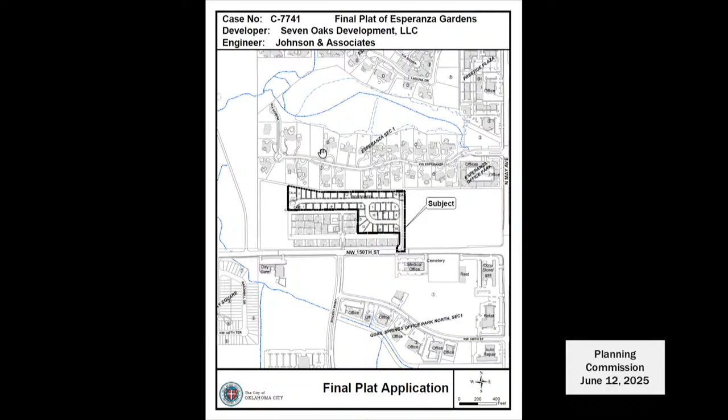The city sends out that notice. Those are typically land use labels. It could have just been shifted, could have been from a former zoning. This property is not permitted to have any multifamily on it. Right, and that's what I was thinking. It was probably the original zoning.

It just says final plat application, so I was assuming it was that. Will there be 1 or 2 entrances? Because I've seen in the PUD, I've seen this entrance that's described here. I've also seen that cul-de-sac and that pseudo entrance to the west. I think the western entrance is a temporary entrance that they have to have for fire protection, for fire protection to conform. And is that on the applicant's property, or is that on the neighbor's property there, the office property?

The temporary would have to be in an easement. It's on the office property. There's an access easement there for emergency services.

I spoke a little bit earlier with someone about the height of the homes that could be built backing up to the Esperanza neighborhood. When I called the city, I was told that it would be no more than 1 story in tract 1, or 35 feet. Now I'm told it's 2.5 stories permissible. Yeah, I believe that the 35 feet is 2.5 stories per the PUD. So which one do you go by, the 35 feet or the 1 story? The PUD is per the base zoning, which allows 2.5 stories or 35 feet.

So the house plans haven't been designed yet, but that's what we're allowed to build to. I'm not sure who you talked with at the city and at what point, but the PUD that was approved did not have a limitation of 1 story on the height. I see.

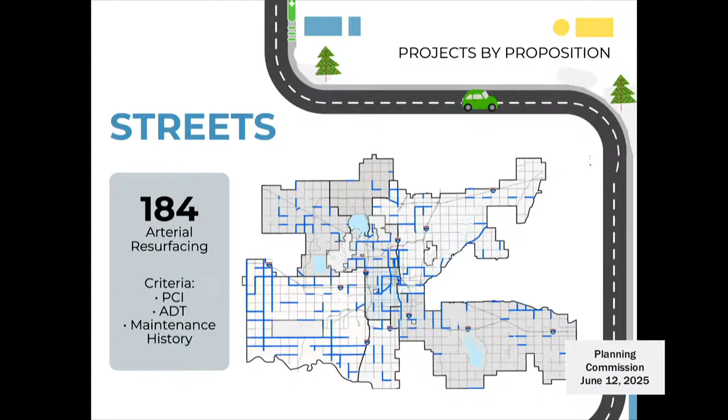You can see the criteria as well on the left there for resurfacing, for example. Traffic counts matter a lot. The PCI, or the Pavement Condition Index, matters a lot.

Sidewalks follows closely Bike Walk OKC, as was mentioned earlier. That was used to prioritize these. Most of the pedestrian priority areas, 13 of them, have an amount of money that will be used to implement Bike Walk OKC.

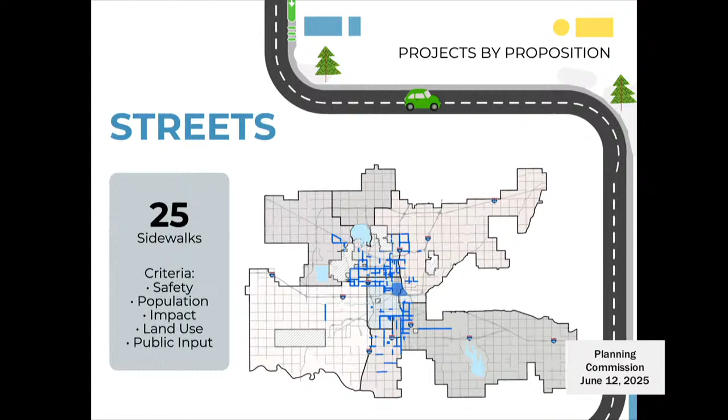Here are those pedestrian priority areas, and in addition, we'll have school access, transit access, and park access. There are funding amounts dedicated to providing sidewalks to those important needs.

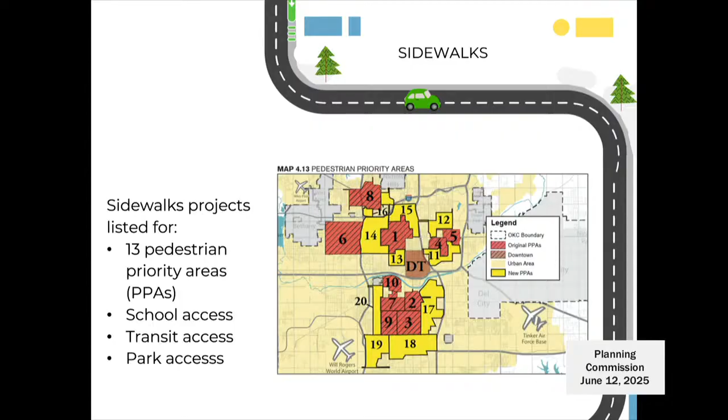Street enhancements, there are 13 listed. Wanted to mention, this is one change that was made since the study session and since the packet was sent out. So there were two major projects downtown that were combined. That's a change from what's in your packet, but the project details, the funding is all the same.

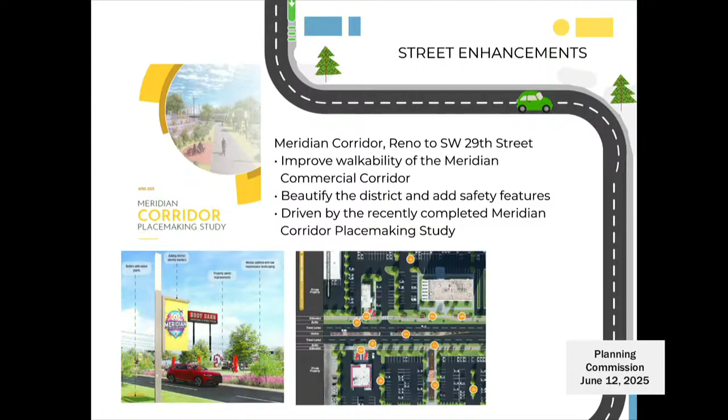Just real quick on the street enhancements, they're driven by, in some cases, like the Meridian Corridor, some recent planning work that we've done. And also the next slide, Classen, will be informed by some planning work that we'll be getting pending the outcome of our federal grant. We'll be starting on that this summer, as we will be starting on the downtown strategic plan, which will inform the downtown expenditures.

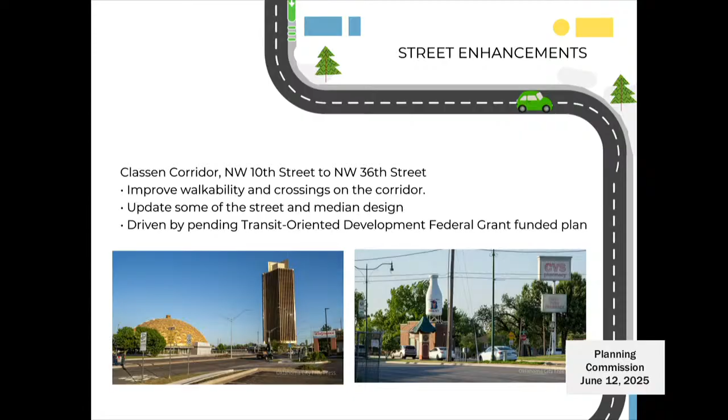So moving on, we've got several bridges, it's 25. I don't have a slide for economic development, so I'll mention that we have $145 million for economic development and community development, which includes affordable housing. $50 million of that will be dedicated to affordable housing. So we can go to the next slide.

We have 25 bridges throughout the city that will be replaced or improved. And of course, that's a safety issue and heavily based on the condition of the bridges themselves.

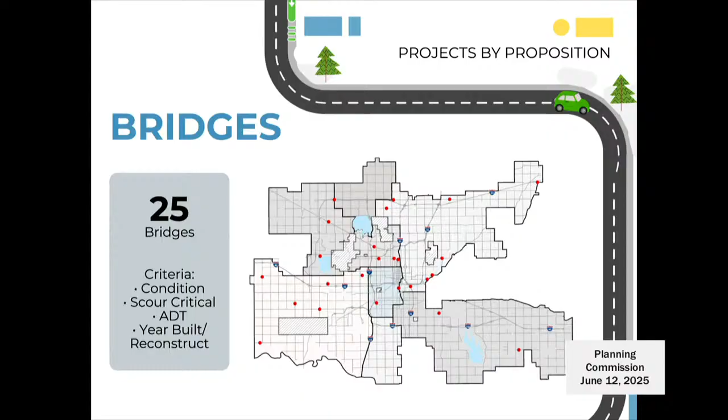We have 25 traffic intersection improvement projects. You can see the criteria there, of course, heavily based on the need, based on the usage of those and the safety factors that we've considered.

Libraries, there are several library improvements, as well as one new library. Parks, that's one minor change. We've combined two state fair park projects that were listed in your packet, so that's now one project. The amount stays the same, the intent is the same, just simplifying a little bit.

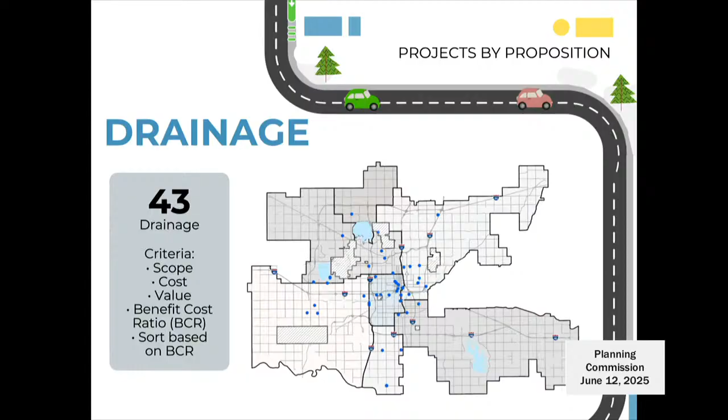And I know there are many, many projects that we would like to do, but we just can't. We've spent a lot of work on prioritizing drainage as we have all the others.

Transit, there's dedicated funds to some facilities that need to be constructed, and again, one new change shown on the slide, a new listed project for the purchase of buses. So the amount is the same, the funds were just taken from the unlisted category and moved to a specific project, just to let people know that we are purchasing additional buses to enhance and replace the fleet.

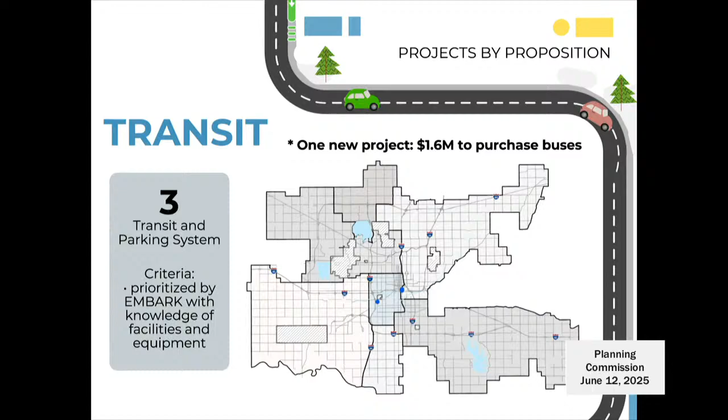And I believe fire, second to last, is fire. And these show the criteria. Of course, the main criteria is population growth. I did want to point out, this is heavily based on a study that was done in 2023.

You'll note that there is no new station in the Northwest, but that is because we actually have funding for a new station in the current bond. It wasn't specifically called out in the Northwest, but the fire department is working right now with Public Works to design that.

Let me find it. It's on 164th, I believe. So 15300 North Rockwell. That will be important to that area of the city, which we've been looking at for some time with regard to comprehensive plan amendments and new plats and new developments. So we're excited that that will be coming soon in that area.

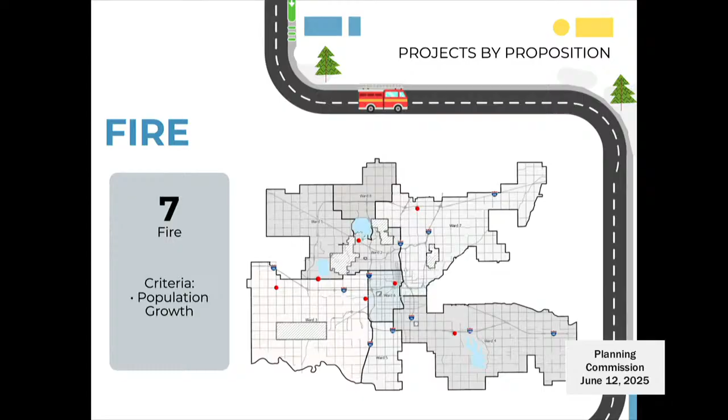And then moving on to police, this includes also courts, family justice, and emergency management. We've got 4 new projects in that as well.

So again, a lot of work has gone into this. We're very appreciative of all the collaboration that's gone on with the various departments and Public Works. Pretty sure there's been a fair amount of overtime worked recently on this, as well as the city manager's office. So with that, we're happy to take any questions. I can, or Aubrey, Debbie, Chad, and also Fire is here as well. So any questions you might have?

I was going to thank you for your presentation and the detailed presentation that we got from you and other city staff, other department directors at the study session. There's some really exciting projects in here. I think this is much different than the last bond as far as the kind of projects that were included. So I'm really excited to see this move forward.

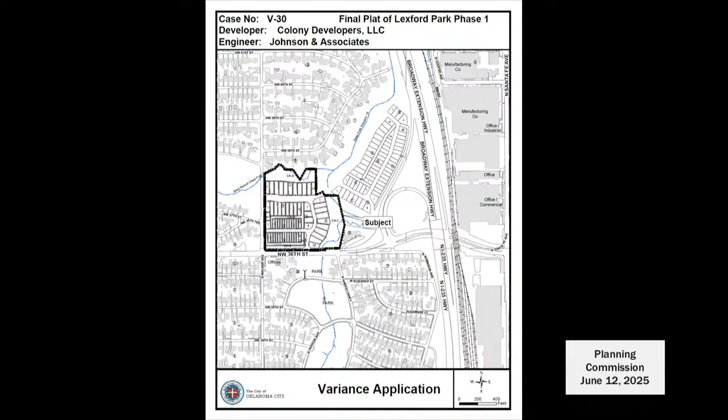Mark Zitzow, Johnson & Associates, 1 East Sheridan Avenue. Before you is a plat that was approved last year. If you've been by the site, it's under construction. The marketing team and branding team re-looked at one of the street names, which was 36 Terrace. After a conversation with the fire marshal, it was determined that there would be support for naming that street Lexford Terrace. So we're here asking for that approval today. Happy to answer any questions.

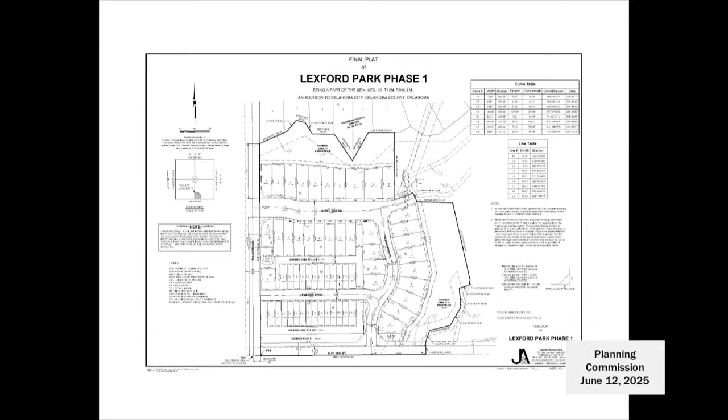Commissioner Powers, this is your ward. Yeah, this is not a surprise, really. I'm glad that the city's okay with it. I think it's a good idea. I don't have any issue with it. I haven't heard from anybody else who does, so.

We're just ready for a motion. If there's not anybody else here who wants to be heard on this item, I'll just go ahead and move approval on item number 6, V30. We have a motion to approve the variance application from Commissioner Powers, seconded by Commissioner Meek. Please cast your vote.

Aye. That item is approved. Thank you.

Item 7 is case DA 15PH, an application for consideration of a lot split or deed approval on property located at 12025 Southwest 104th Street, and a variance to the subdivision regulations.

Hi, I'm Jody Norris. I live at 12025 Southwest 104th. We have a 10-acre property, and we're just looking to have it split. We are lacking on the front the 300 feet required. It's 275 is what we have. So that's what I'm here for.

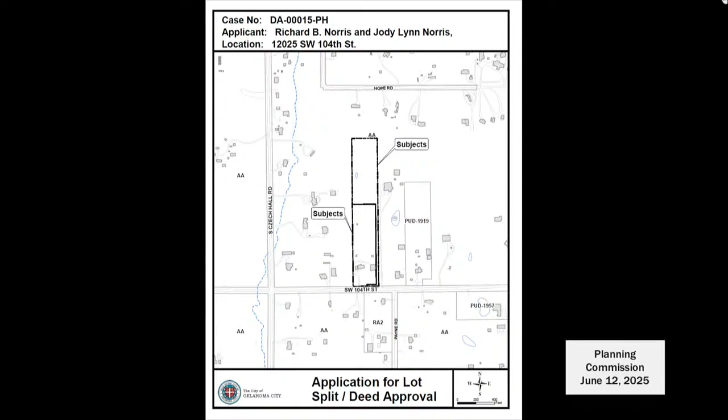We just are kind of looking towards the future. My husband's a 100% disabled veteran. He's going to be 60 next year. We're wanting to be able to put a family member on the back that would be able to help us with the upkeep of the property.

All right, thank you. Commissioner Meek, this is Ward 3. Yes, thank you, Mr. Chairman.

I've looked into this, and it is the variance that would be needed. They are 25 feet short of the required 300. I don't have any issue with this unless any other commissioners have any. No objections, I think it seems pretty straightforward. We're talking about 25 feet.

Right, do we have anyone signed up to speak on this? I do not have anyone signed up to speak. Okay, with that.

First we'll do the variance. I'd like to recommend approval of the variance to section 3.4.4.C.2E.C. Another C in there. All right, we have a motion from Commissioner Meek to approve the variance. It's been seconded by Commissioner Newman. Please cast your votes. Harrison, aye. And variance is approved. Now the item.

Yes, I'd like to recommend to approve DA-15-PH. All right, motion to recommend approval from Commissioner Meek, seconded by Commissioner Govine. Please cast your votes. Harrison, aye. All right, and that is approved.

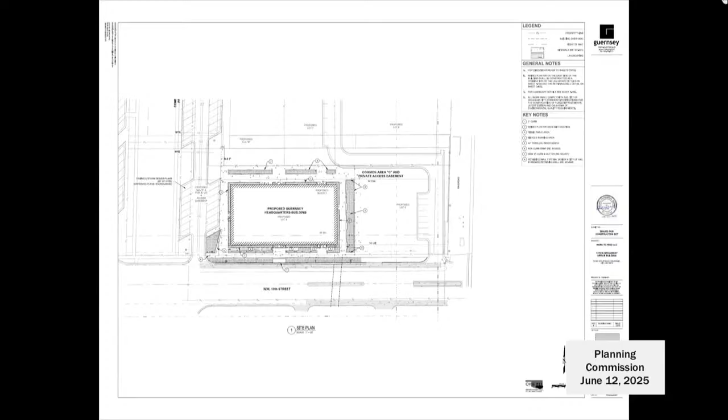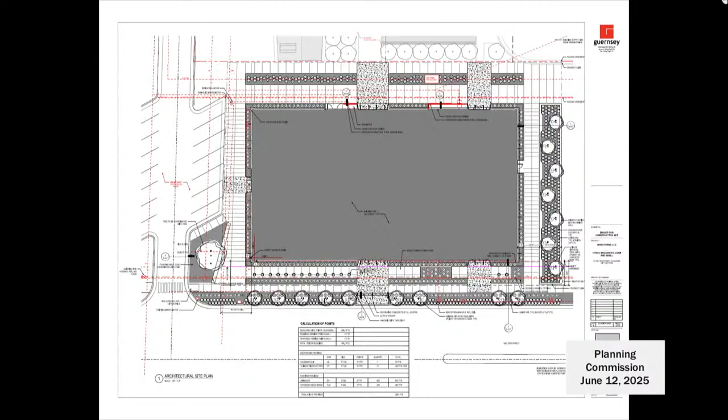Commissioner Govine, this is Ward 6. Thank you, Mr. Chairman. Yes, so this is part of the 13th and Broadway master plan development. It's a specific plan application. It meets all the guidelines, and I don't have any issue with it. I think it's a good addition to the Midtown downtown community. It's good to have a new.

Is this an owner-occupied office building? Yes, sir, is that right? So it's being designed and built by Guernsey to house Guernsey's headquarters? It's designed by Guernsey, built by Vincent. Oh yeah, built by Vincent. Correct, but it's for the headquarters office for Guernsey? Yes, sir. Great, well I wish you luck.

Are there other questions? I don't have anyone signed up to speak. Okay, I will move to approve PUD 1915 SP03. We have a motion to approve the specific plan. I'll note for the record that staff's review of the specific plan for the development indicates the proposal is consistent with PUD 1915 Master Design Statement and the Master Development Plan. That's been seconded by Commissioner Noble. Please cast your votes. Harrison, aye.

And that item is approved. Thank you. Thank you. All right, item 9. This is case CE 1142, application to close all of the platted public alleys in Block 3 of Trosper Park, Highland Addition, east of Highland Park Drive and south of East Grand Boulevard.

Good afternoon, David Box, 525 Northwest 11th. Here on behalf of the applicant, this is a closing application. Jared, if you go to the aerial, this has been contained within my client's site for many, many years. Whether or not it's ever been open to the public is probably debatable. So the closing of this will ultimately end in a vacation action. We don't believe it'll impact the public whatsoever. Happy to answer any questions.

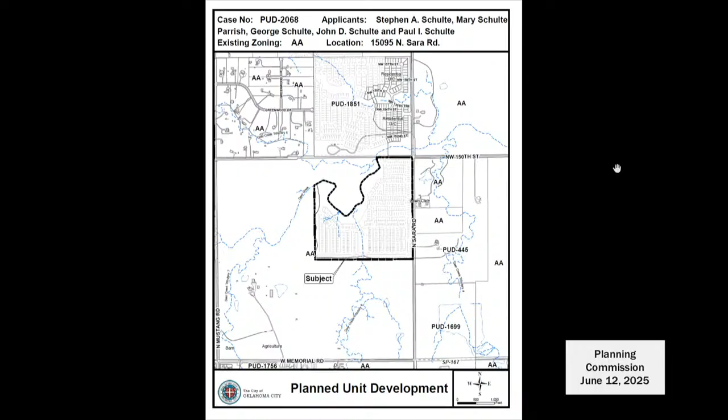Can you walk us through the development a little bit, about the 3 distinct tracts and the types of products proposed for each? Absolutely. The site is approximately 126 acres total, broken up into 3 separate tracts. Tract 1 in the north will be a private gated development with 125 single-family lots. Tract 2 will be 2-family, with a crash gate to tracts 1 and 2, and entrances onto tract 3. Tract 3 will be single family with 40-foot by 110-foot lots, approximately 379 of those lots. There'll also be 72 duplex lots - I didn't mention that.

And on tract 2, you mentioned a crash gate, so that's only to the north to the gated area? Correct. Connectivity to the south will be just like any other street. Yes, sir. There'll be 2 entrances onto Sara that right now I have planned, 1 in tract 2 and 1 in tract 3, but those could be shifted around as necessary between those 2 tracts since they're interconnected fully.

This is my ward. I don't have any real major concerns with this. I like the diversity of the housing type. Not in love with the 40-foot lots on the south tract, but I also understand that not everyone can afford a larger lot, a larger residence. So I think in the end, the diversity of housing types is a good thing.

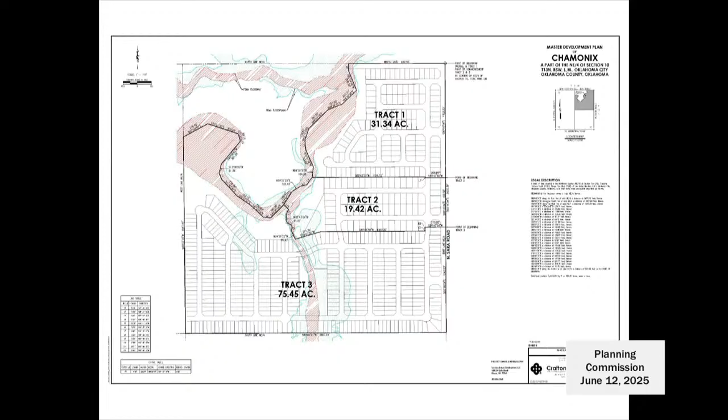Guys, I know I'm preaching to the choir, but I'm big on this. This is a PUD. This is the time and place in which it's a give and a take. This is a whole lot of houses, especially 40-foot lots on the south portion of this map, and every 40-foot lot would be responsible for their own rotting stockade fence along Sara Road. If now's our chance to require a masonry wall to be put in by the developer, I believe that's not a bad ask for this many lots and this type of homes.

I think that's a reasonable request. I think that's something they would consider for sure. Commissioner Powers, do you have something to say? It's nice, but writing it into the PUD would be better. Are you in a position to contact your client and find out whether they're agreeable?

Can you approve a masonry wall all the way down Sara Road? The discussion was—if you could come to the mic, we just want to make sure we capture this—the discussion was that we're going to put in the PUD that we would do brick or stone columns every 25 feet with a cedar fence cap, uniform from north to south, all maintained by the homeowners association, with nice decorative entrances beyond that. My concern specifically is the stockade portion, and we're asking that to be changed to full masonry, at least on the Sara Road main thoroughfare, other than where you have gates.

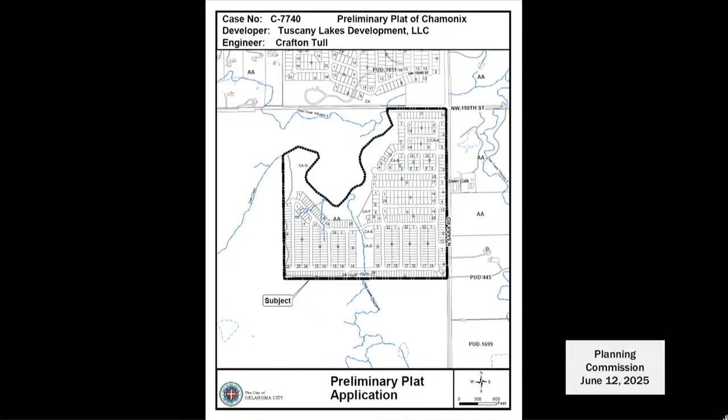I'm just here to answer any further questions regarding the plat. Are you in agreement with all the TEs? We are in agreement with all of the TEs and seek approval.

We're going to add a TE. Looks like you got a maintenance note in there already on the plat, so that may suffice. That's pretty typical for HOA plats. Does that include the fence, though? It would include anything that's built by the HOA normally. We'll add it, just to be safe.

I'd like to make a motion to approve C-7740 with TEs 1 through 6 as written, with the addition of TE number 7 as a plan note to state that the perimeter fence will be maintained by the HOA. On Sara Road, the whole thing? The entire perimeter fence maintained by the HOA.

We have a motion from Commissioner Noble to approve the item. Our system is down, so I need a second by voice. Seconded by Commissioner Powers. We'll voice vote. Commissioner Powers? Aye. Commissioner Meek? Aye. Commissioner Privet? Aye. Commissioner Newman? Aye. Commissioner Govine? Aye. Commissioner Harrison? Aye. Commissioner Noble? Aye. Commissioner Clare is an aye as well. That item is approved. Thank you.

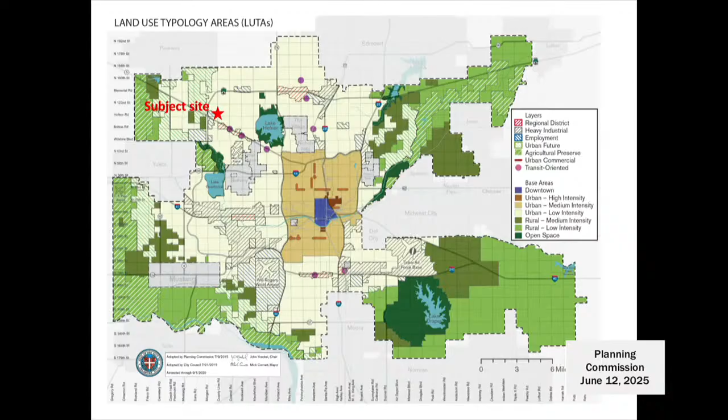Vaneri Mujica Ortiz for the Planning Department. This is a request to remove the employment LUTA, from the urban low LUTA base designation. The associated application is PUD 2069. It's located on the northwest quadrant of the city.

In terms of the existing conditions, I want to clarify something here real quick. The pink polygon or square there is actually the proposed amendment. The blue ones is what we are recommending to expand in case the recommendation is to approve the CPA. So you're going to see both in all the maps, but the original proposed amendment is only the pink area.

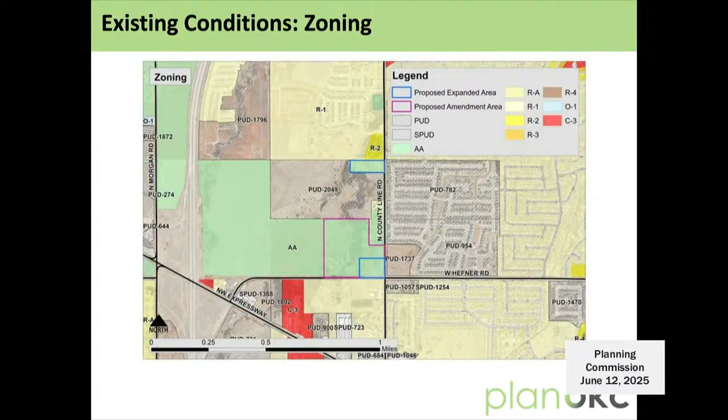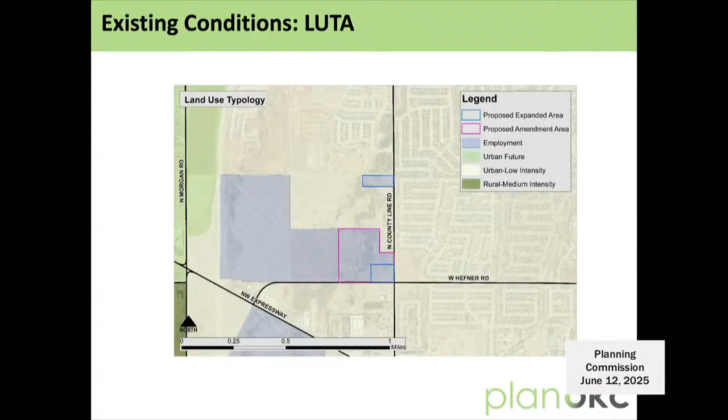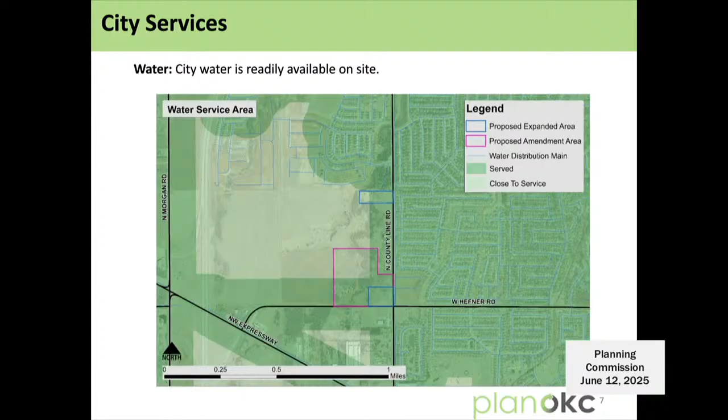In terms of land use, almost all the area is undeveloped. In terms of zoning, it's agricultural, surrounded by residential. In terms of the LUTA, or land use typology, it's an employment area. To the west, there's more employment area too. To the north, we have that little stripe of employment area, and to the south, urban low plus a little bit of employment area too. In terms of city services, as is common of these areas, city water is available, sewer is available, and fire and emergency services are within urban response time.

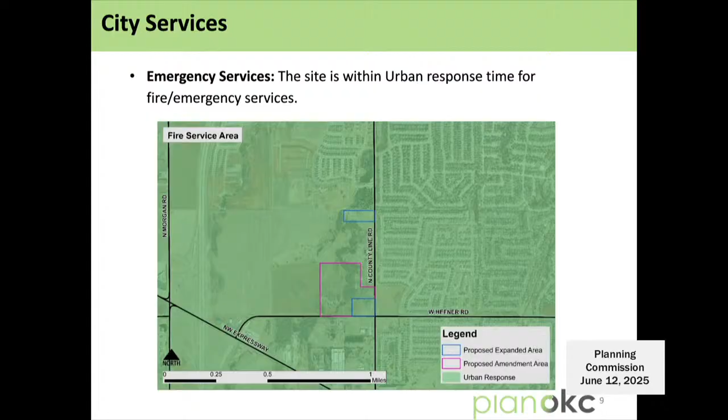In this case, the subject site is an excellent site for employment uses due to its proximity to highways, other employment uses, and city infrastructure. Well-served and situated employment land sites are limited on the northwest area of the city, where sites suitable for residential uses are more plentiful. Preserving employment land to facilitate job creation remains critical to Oklahoma City's overall economic stability and future growth. Removing the EM designation on this site will reduce the amount of development-ready EM land available on the northwest quadrant of the city, lessening the city's ability to retain and attract large employers. Based on the finding above, the staff recommends denial.

But in case the Planning Commission decides to remove the EM layer, then staff recommends including those extra 11 acres just to maintain the same type of LUTA designation for the same site. I don't know if you have any questions. Any questions?

This is Ward 1, and this is something we've dealt with for a long time. It's a struggle because the comp plan has designated this as employment reserve, but the employment centers aren't coming, while the housing developments are. So how do we continue to put off much-needed residential for employment area? I don't know, it's a tough one.

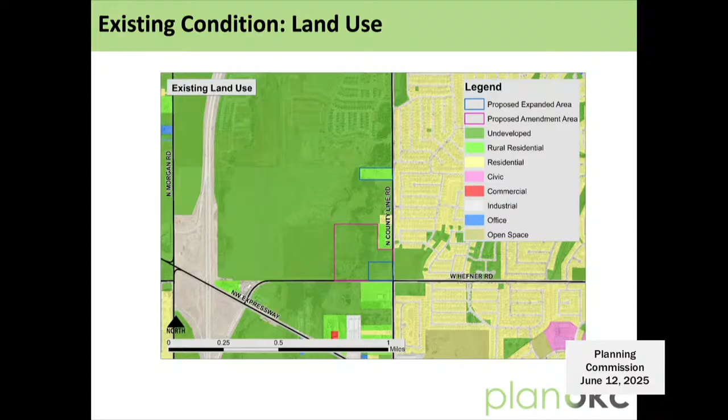One of the things that we didn't see an exhibit on, but is in the comp plan, is just the overall area employment overlay in this area. It obviously goes west, but it's also on the south, and then on the west side of the turnpike there's another huge, significantly larger portion that's also designated too. So there's still a lot of opportunity out there for employment.

I had a quick question about the CPA we're hearing. The applicant asked for 31.95 acres, but they've recommended denial, and if we approve it, they're asking to pick up another 11. Does that—just because the applicant representative didn't own, or—can only own that, submit on behalf of what the client controls? So that's the 11-acre difference? Correct. Okay, all right, thank you.

Anything else from anyone? Okay, no? Nope, I think we're ready for a motion.

With that, I'd like to make a motion to approve CPA 2025-03, with the addition of the 11 acres on the corner.

All right, we have a motion from Commissioner Noble. Our system is back up. Good job. Seconded by Commissioner Meek. He beat you online. Please cast your votes. Harrison, yes.

And that is approved. Thank you.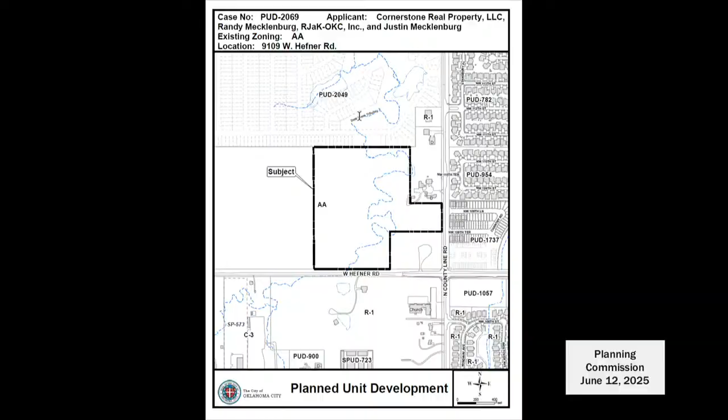This is the corresponding application with the comp plan change you just saw. We've proposed a combination of townhome development along the frontage and multifamily along the back. We've limited the multifamily to approximately 20 units an acre. There's a significant blue line that goes through here that's been respected within this site plan. Staff now recommends approval based upon your previous action, with TE1 asking to establish a maximum number of units or a density for Tract 1. We propose a max density of Tract 1 of 8 dwelling units per acre. Happy to answer any questions.

This is Ward 1, I don't have anything to add. This is a product that's not out there. I think it makes a lot of sense in such proximity to the turnpike, so I'm in support of it.

Anyone else have any questions? Just one question on the facade, and that was, it's a 60/40 product. Is that both tracts? Yes, sir. Consider on the townhomes, maybe 70/30?

It's just, again, more of a standard that we use. Yeah, that's fine on Tract 1.

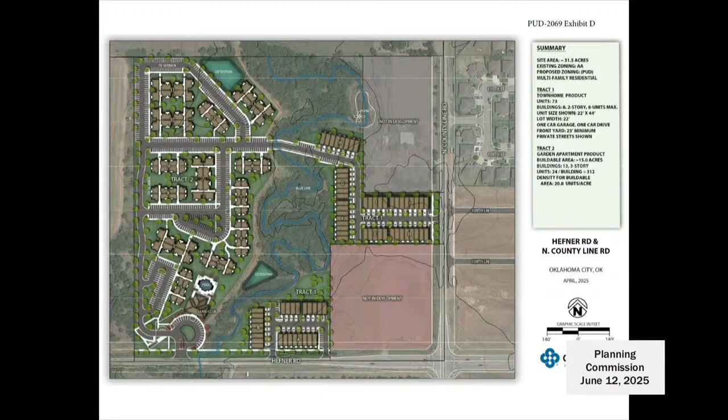Anything else from anyone? No? And there's a TE1, right? Yeah, and that we would request that to be 8 dwelling units per acre, and then add TE2 for Tract 1. Good, I'd like to make a motion to recommend approval of PUD 2069 with TE1 stating 8 dwelling units per acre, and TE number 2 stating that Tract 1 would have 70% brick and 30% other.

In the architectural facade regulations? Well, and just real quick, the clerk's office has become very picky on the words used. You're not saying 70% other. What you're saying is the same wording that's in the PUD except for Tract 1, instead of 60 it's 70, and 40 it's 30. Exactly. Okay. I don't want to get pushback where I have to have...

30% other undefined. All right, we have a motion from Commissioner Noble to recommend approval of the item, subject to the technical evaluations. It's been seconded by Commissioner Powers. Please cast your votes. Harrison, yes. Thank you, and that is recommended for approval.

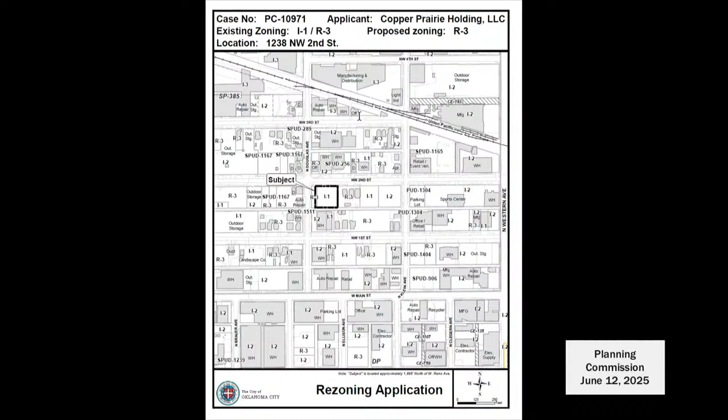But is there any other questions or people signed up to speak? I do not have anyone signed up to speak. If there's no further questions, then I will move to recommend approval of item PC 10971. We have a motion from Commissioner Govine to recommend approval, seconded by Commissioner Meek.

Please cast your votes. Harrison, yes. And that is recommended for approval. Thank you, and guys, good luck.

Item 16 is case PC 10974, application to rezone 7025 Kleiner Avenue from R1 to R2.

Hi, I'm Richard Starks, P.O. Box 2618, Blanchard, Oklahoma. I'm representing Lyndon Harden. And you're at? 300 Carla Court, Yukon, Oklahoma, 73099.

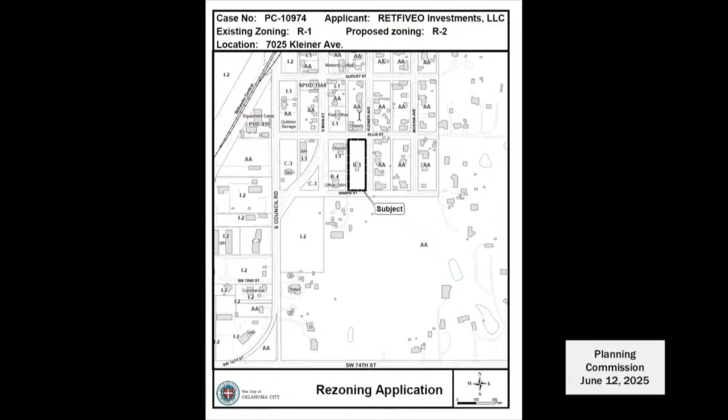And the basis for wanting the rezone was to build duplexes. I did not realize we stepped into an issue on septic and aerobic systems with this. This is our original layout, and we were showing 4 units, 4 buildings with 2 units each, and I was laying out a conceptual aerobic system like a spray field, and everything appeared to fit. There are DEQ requirements that limit, if you're on municipal water, they limit you to half an acre per building.

So we would violate that with this, but there is an exception in their code. It's subsection D, and it says for lots platted before 1974, you just have to follow the rest of the rules—the ½ acre and ¾ requirements don't apply. So when I prepared this, I was running under that assumption that we could use that exemption.

That's the basis for this design. Last night, we submitted another one. Once I found out we were going to have an issue with this, I submitted one where we eliminated 2 of the buildings, so you'd have 2 duplexes, 2 buildings with 2 units each.

Commissioner Meek, this is your ward. You want to lead our discussion?

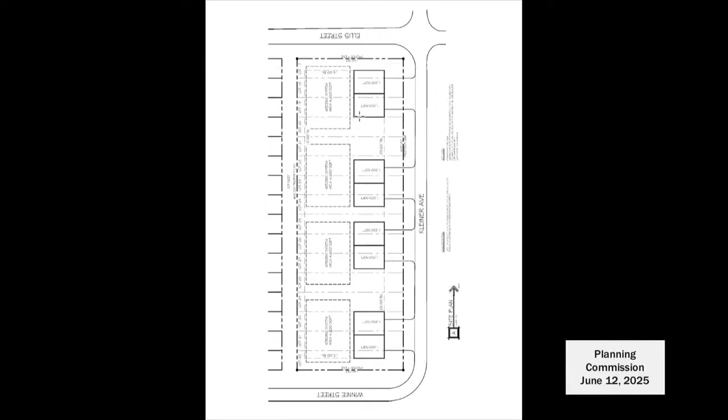Yes, thank you, Mr. Chairman. I spoke with Mr. Starks yesterday, and the way I see it, the way they're currently zoned right now, they could build 2 houses—not duplexes, but 2 houses—and they wouldn't have to ask for anything except a building permit. But when you try to go into a rezoning process, you have to deal with a couple of council and commissions. And this commission, we have precedents that this is not meeting.

Did you bring any of the new exhibits to pass out by any chance? I just emailed them in yesterday. So I got the email, and it has 2 duplexes and 2 aerobic spray fields. So on 1.29 acres, that would be what, 0.64—wouldn't be the ¾ that we've been following.

It would be under ¾ of an acre. But there's a whole other issue I've got to get my brain past—it's not just 2 houses, it's 4 homes, 4 kitchens, 4 laundry rooms. So I did do some digging today with DEQ and with several installers. And this is just for you guys to help me with this discussion—can you put an aerobic system, one aerobic system, on a duplex?

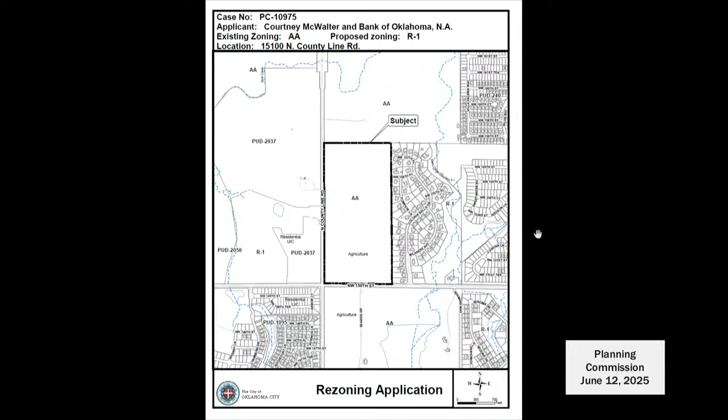Jared, there's an exhibit I think you have. Our application is to rezone this site to R1. I brought this exhibit because there was a protest letter that came in. The engineer did go visit with them. I don't know if anyone's here, but what we seek is R1. It's important to note that everything to our east is also zoned R1.

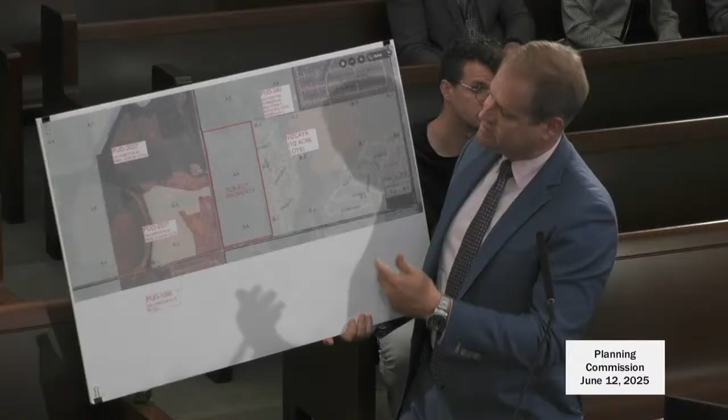You have a PUD to the north and east that allows for duplexes, patio homes, R1. To the west, you saw 2 applications in the last few months to allow for 40-foot lots immediately to our west. To the south and west, you have PUD 1095 that allows for both R1 and R1ZL. Again, we're asking for R1. So with all that considered, we believe it to be compatible with the area's surrounding zoning decisions that have been made recently. We'd ask for your approval.

This is Ward 1 again. I don't have anyone signed up to speak, so there's no one here that I'm aware of. I did read this, I think they read the same letter that you did, and I'm sure everyone got it, but just to summarize, a lot of the concerns were that they wanted to see new entrance and exit ramps on the Kilpatrick Turnpike, which, to be clear, is the Oklahoma Turnpike Authority, and we have no control over what they do. They also talked about additional signal and intersection improvements at Northwest 150th and Rockwell, and Council, and widening of roads.

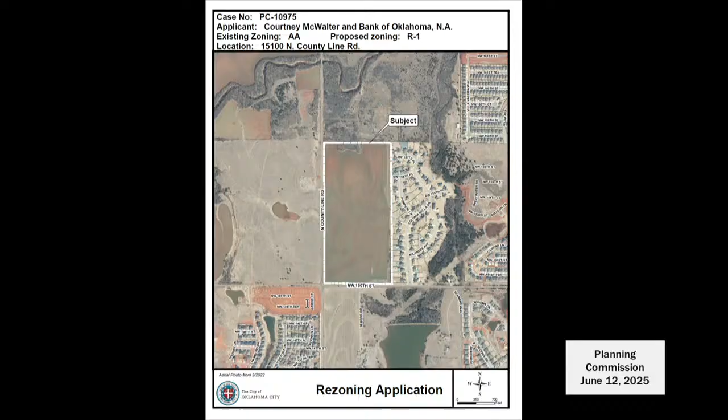I didn't go back and double check if any of those areas were included in the bond projects we saw earlier today, but as we know, when you bring these new developments in, that's what drives those types of improvements. So I'm in support of the application. I think it's pretty straightforward, and I'm happy to hear any questions or comments.

Did anyone sign up? No, I don't have anyone signed up to speak. Anything else from any commissioners? Straight zoning, R1, 6,000 square foot lots.

Good. With that, I'd like to make a recommendation for approval of PC 10975. A motion from Commissioner Noble to recommend approval. It's been seconded by Commissioner Newman. Please cast your votes. Harrison, yes. Thank you.

Item 18. Item 18 is SP 599, application for a special permit to operate use unit 8250.7 emergency shelters and feeding sites in the I-2 district, located at 520 North Villa Avenue.

Hi everyone, I'm Rachel Freeman, Chief Executive Officer for City Care. I've been with the agency for 9 years, my address is 536 West Hill. Since 1996, City Care has been investing in neighbors who are experiencing and transitioning out of homelessness. We have invested in the West Lawn Gardens neighborhood since that time. Over those years we've built 112 units of supportive housing. Additionally, we built a low barrier shelter, and we purchased the building directly to the south of it, and we're requesting a special permit to open a medical respite shelter, which is recuperative care for folks who are discharged out of the hospital and have nowhere else to go. I've got Ryan here from GSB, and he'll be able to answer any questions about the building, and then I'll be able to answer any programmatic questions you might have.

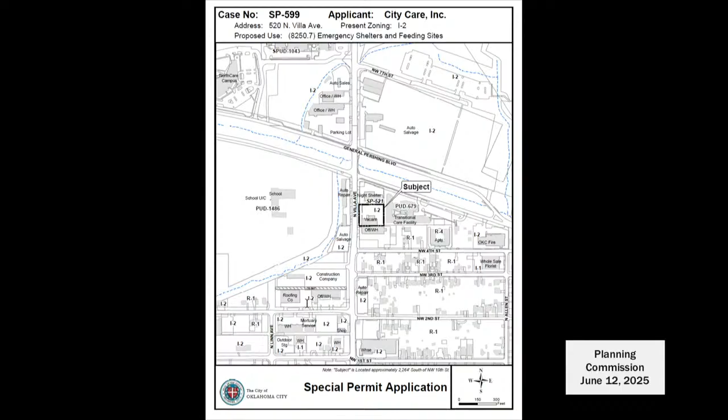Good afternoon, Ryan Eshelman, GSB, 3555 Northwest 58th. As you can see, this parcel, this I-2 parcel, is located just south of General Pershing on Villa. It's on the site of a former auto repair shop.

If you advance, you can see the current facilities on the site, which will be removed for our renovation. You can also see City Care's facility immediately to the north and immediately to the east, as well as some existing office warehouse to the south.

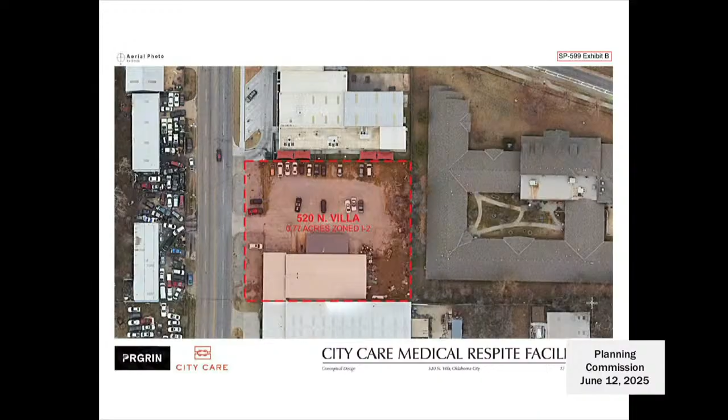We've had the site surveyed. All the utilities are on site and located. Topography has all been established, so we're in the design process.

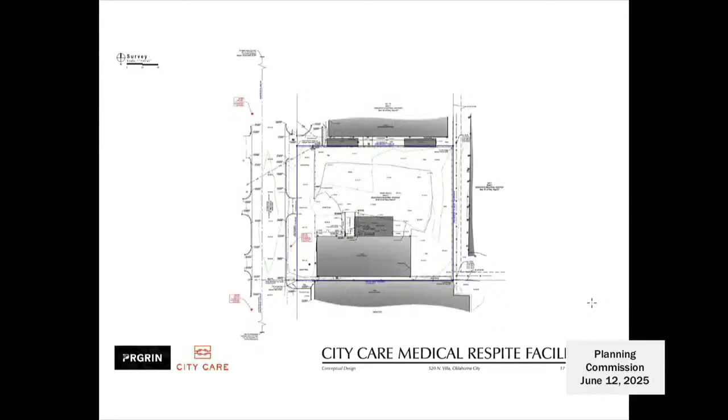The site itself has the building, which is 3 stories tall, located on the south property line, a little more than 10 feet off the property line, with parking to the north and a single driveway, with some buffer on the west side as well.

The floor plan consists of medical respite guest rooms on the first and second floors, 20 on each floor. Think of them like dormitory rooms. So folks have been discharged, but they need a place where they are out of the elements. Someone's monitoring that they're taking their medication. They may be having therapists come in some portion during the week to do physical therapy. So there's shared restrooms, shared common lounge and dining space. Food will be brought over from the adjacent facility that City Care operates.

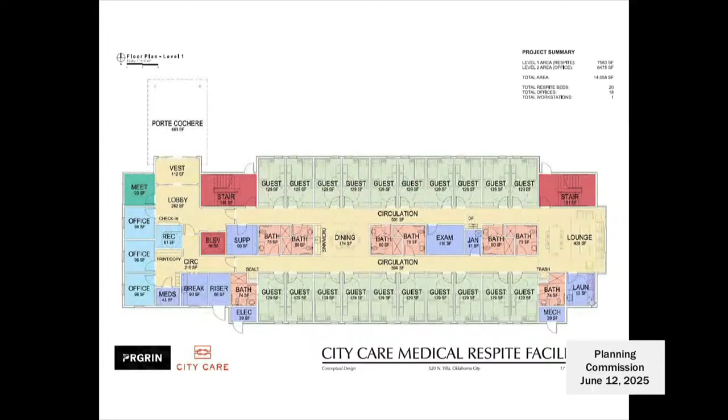There's controlled entry, so you have to check in and out. There's not free movement. Only the residents who are staying here are allowed in and out.

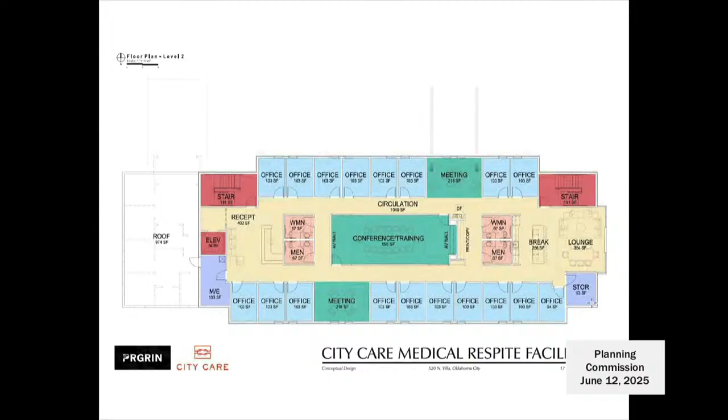On the third floor is office space for the City Care organization. They are consolidating all their office space onto the upper floor, which will be segregated with controlled access. It's just standard office and meeting space up there for them.

Commissioner Govine, this is your ward.

Thank you. I think it's important. I'm sure the other planning commissioners have had a chance to read through the Exhibit C special permit application, the program description, which I've read through. I believe they have a good plan in place, that the facility is operated, well managed, well run, staffed, and complementary to services they're already providing on this site. I'm in full support. I think they provide a much needed public health benefit, and this is an appropriate location for it. So I'll turn it over for any further questions.

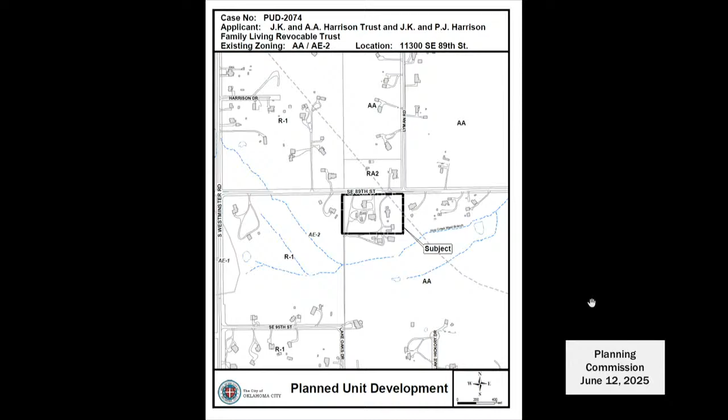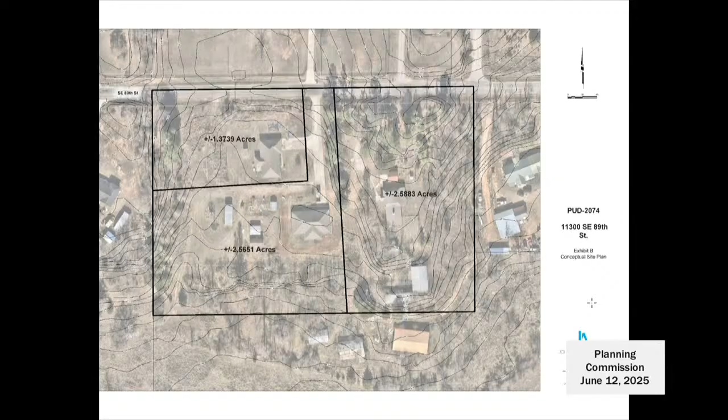We've had no protests, no calls. Staff recommends approval with no TEs. I'm curious how they got their building permits, but other than that, I think it's pretty straightforward and makes sense. One lot's a little smaller than the others, but I can live with that with just 3 houses.

So I'm good. Do we have anybody signed up to speak? I do not have anyone signed up to speak. All right, I'll go ahead and recommend approval of PUD 2074. A motion from Commissioner Privett to recommend the item, seconded by Commissioner Newman. Please cast your votes. Harrison, yes. And that item is recommended for approval.

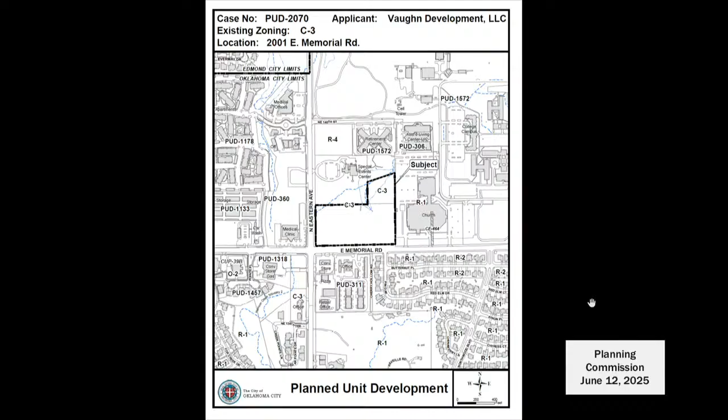Thank you. Thank you. Item 20. Would you like me to introduce it in the absence of— well, Mr. Butler, I was going to introduce it. All right. Item 20 is PUD 2070, application by Vaughn Development LLC to rezone 2001 East Memorial Road from C3 Community Commercial District to PUD 2070 Planned Unit Development District. This is in Ward 7.

Mark Zitzow, 1 East Sheridan Avenue. Jared, if you go to the site plan, this is an application for a 2-tract PUD, the hard corner being commercial, and everything behind it is a townhome-style development popular in this part of Oklahoma City/Edmond. The way we've laid it out here mirrors the PUD. Staff has recommended approval with 1 TE. That TE is actually already in the PUD, so whether it needs to be struck or agreed to, we're fine either way. The PUD in Tract 1 outlines the bulk standards for lot sizes, setbacks, and everything else. So I'm happy to answer any questions.

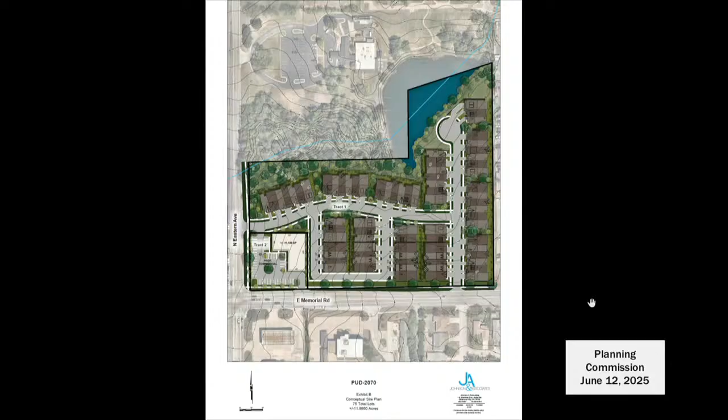We've received no calls, no submitted protests, and I don't know that anyone's here. I do not have anyone signed up to speak. So this is Ward 7—Commissioner Harrison, do you have anything you'd like to add? No additional conversation, just move approval for PUD 2070. Anything from commissioners? All right, we have a motion from Commissioner Harrison to recommend approval of PUD 2070, including TE1, subject to the technical evaluation.

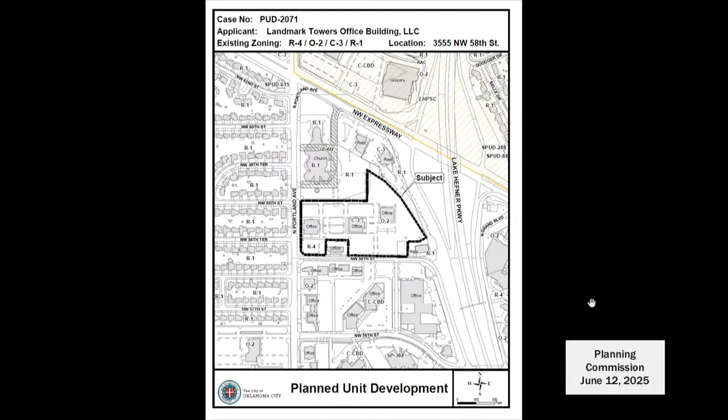Once again, David Box, 525 Northwest 11th Street, here on behalf of the applicant. This is a unique application where we seek to take three existing office buildings that have been there for some time. They're pretty prominent along Hefner Parkway, but the office market everywhere is in trouble, and the suburban office market is in real trouble. So this is an adaptive reuse of the buildings to convert them to a multifamily project.

We're excited about it. We think it's a great location. Obviously, with everything going on Northwest Expressway with the rapid transit and the bus, we think all of it is very positive. So there are three TEs, all of which we agree to.

Commissioner Powers, Ward 2: Well, this is really one of the unique applications I've seen in my time on the Planning Commission. I think it's a great idea, and I think there probably are going to be more and more buildings in Oklahoma City that used to be offices that need to be housing. So I'm in favor of it as a concept.

I am satisfied with the amount of green space they were able to squeeze out of the State Historic Preservation Office, but I have a couple of questions for you. Since it's entirely possible, even with historic designation, that the buildings could get torn down at some point in the future, I have a question about whether the facade regulations would require SHPO approval specifically.

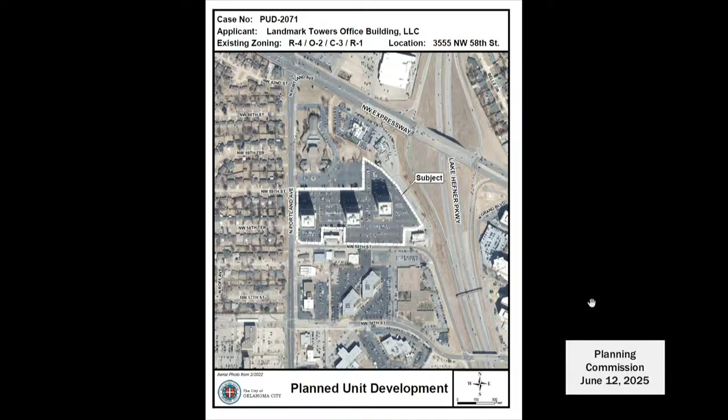It was self-imposed. So the last TE says a specific plan will be required for any new development not meeting the criteria above, and goes on. I'd like to put a period at the end of the word 'development' — that a specific plan is required. If you're going to redevelop a property, I think it needs a specific plan. Can we agree to that?

If the buildings come down and you're going to put something else there someday — if the buildings come down, I think that's the intent of the TE. But if it's consistent with our historic preservation tax incentive as approved through SHPO, we don't want to have to come back here. Anything that isn't part of that, I think, was the purpose of the TE.

Sarah, I may need to rely on you. I want to be clear about this. I'm not willing to give them a blank check on any future development of the area without a specific plan. What our TEs intended, both TE 2 and 3, was to state that if they are going through SHPO and getting the historic preservation tax incentives, they do not need to come back to this body, because SHPO will determine their design and everything. In any other case, they would have to come back for a specific plan, and we're fine with that, because that means we're doing something different than utilizing the historic structures.

In other words, even if they are converting these structures, if they are not using the SHPO process, they would come back to you, even for these buildings. Okay, now I'm a little confused, because SHPO will scrutinize 100% of their facades and their use of the interior historic fabric. They will review the site, but they don't dictate things like access — there are still a lot of variables SHPO won't necessarily dictate that would still be important to see, like connectivity, in a specific plan. Okay.

Okay, well, I'm not making a motion until I see it, so take your time.

I can tell a few jokes while it works its way around. I will say, Mark Zitzow was very happy. He was worried that Henry Hudson's would go away, and if you go back to the site plan, you'll see that Henry Hudson's was carved out of this, so Mark can still have lunch there. Nice, drink his lunch. Teenagers got to have a place to get their beer, you know?

Okay, I'm good. I think that makes sense, as long as if it's not going through there and it's a different development, then the specific plan kicks in.

Okay, are we good? Is there anybody here who wants to speak? I do not have anyone signed up to speak.

Is there anything that we can do to tie the site, basically tie that to that exhibit? I think that's what the purpose of the TEs is.

Which all, like I said, we agree to all three. Are we comfortable with that, Sarah? Is this what we're gonna get? Well, the only thing I could suggest then is TE2 could refer to that as an exhibit or whatever.

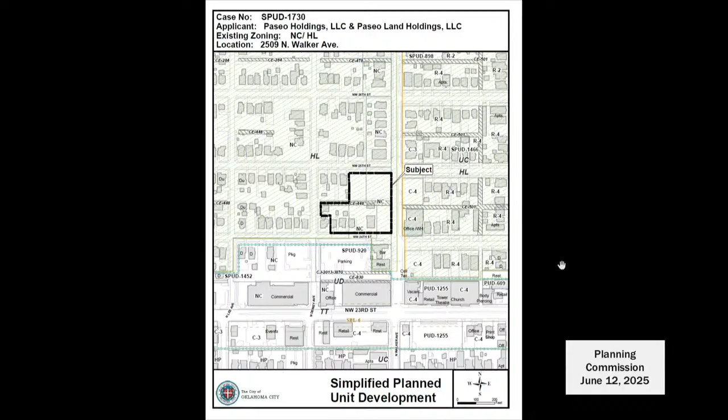What I have seen as far as, I think there was one protest, and we also had public comment at HP, was the intended use here. I think it's important for us to realize that this is just kind of a patchwork of zoning right now, and it's making redevelopment extremely difficult.

Part of our existing zoning is commercial. There's also a SPUD that's allowing for parking, restaurants, bars. So some of the negative comments and concerns we're seeing, we already have the possibility of doing this in this development. We're actually, with this SPUD, scaling back a lot of the uses that could be done, and we think that's going to be a benefit and really should ease some of the protesters' concerns if we can make that clear to them.

Another comment to get in front of - I know there was a concern regarding the height being higher than intended or designated. We were going from 35 feet to 40 feet and 3 stories. It's also important to recognize that any new building or exterior change has to go through HP. We're going to have to receive a certificate of appropriateness, and all of the compatibility of height, massing, and design will be reviewed at that stage. This is just simply allowing us to do it if HP would grant that ability.

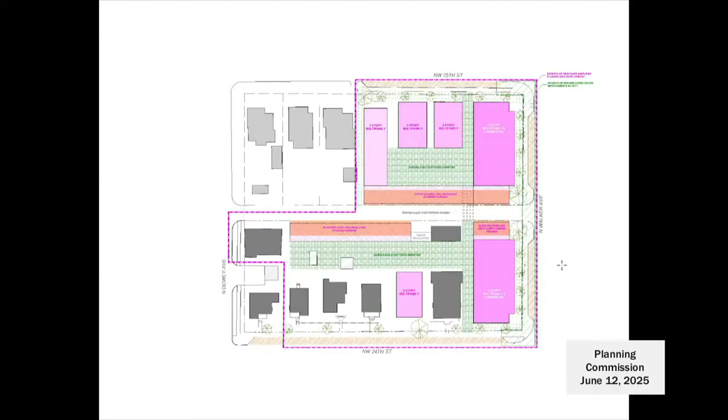Lastly, I just want to... Before you say anything, do you agree with that, Katie, that if we permit the height limitation to be 40 as opposed to 35, that is only if the HP Commission approves it?

Yes, in the sense that the overall design and compatibility still has to go through the design review process and be deemed appropriate and approved by the commission. So just because they're allowed a numerical height doesn't mean they can build up to that height however they choose if the commission doesn't otherwise deem the overall design appropriate and in keeping with the guidelines.

Well, but that's not exactly the same thing. My concern is if we allow a particular height - this doesn't have anything to do specifically with this - and send that off to another commission, in this case the HP Commission, the argument would be made by any lawyer, I think: we've already got this part set. It was set when the PUD or SPUD was approved. So what it looks like, how it's shaped, that we can discuss at HP, but the height limitation is cast once it's been approved as part of the PUD or SPUD.

Yeah, I will. I'm just curious to get your view of that. So generally our interpretation when it comes to underlying zoning and design review on top of that is that the design review process and their regulations and guidelines supersede. So if the design review process is more restrictive than what an underlying base zone would allow, then that supersedes. I'll defer to Municipal Counselor.

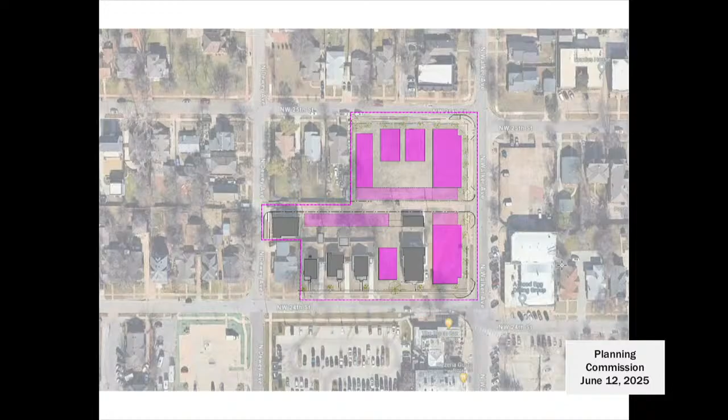So the question was, how big is our personal and convenience store commercial going to be? I'm sorry, I had a hard time hearing you. We were talking initially about limiting the size of convenience sales and personal services. What we would recommend would be that personal services be simply limited to first floor, 24th and Walker facing only. We wouldn't do anything on 25th and nothing on any of the second or third stories. I like that answer. Okay.

Okay. Is there anybody here who wants to be heard? I do not have anyone signed up to speak. Do other commissioners have any questions, concerns, or comments?

Okay, well then, I'm sorry. I'm glad to see something happening here. I'm glad you've teased out some good information too, Commissioner Powers.

Okay, so I'm going to recommend approval of item number 24, SPUD 1730, with the addition of a TE that limits the use - I'll have to read it - of convenience sales and personal services to the first floor only of those structures facing 24th and Walker. That's it.

All right, we have a motion from Commissioner Powers to recommend the item to City Council for approval, subject to the technical evaluation as read into the record. It's been seconded by Commissioner Govine. Please cast your votes. Harrison, yes.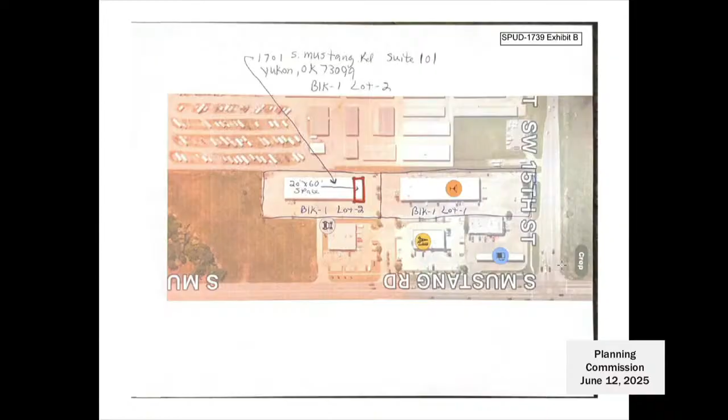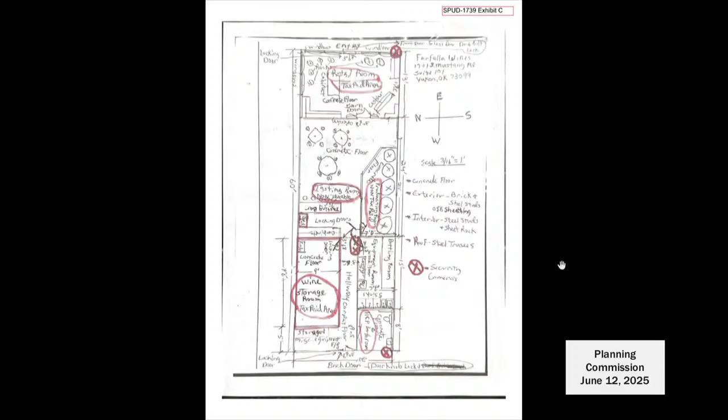I'll take it. All right, Commissioner Meek. Yeah, I'll take it from here. I spoke to Mr. Jester, and I spoke to several people that, believe it or not, are in support of this. And I think, and I spoke to staff, one of the issues we had is that to have a winery, it picks up this industrial requirement. And irregardless of the floor plan, what was decided was to rezone the entire lot, which is the entire building, but it is limited only to winery use. The reason it was done that way was so that if another tenant moved out and the winery wanted to expand, there wouldn't have to be another rezoning.

So did we have anyone signed up to speak on that? I do not. Okay, any other commissioners have any questions on this? Okay, well with that, let me change my screen here.

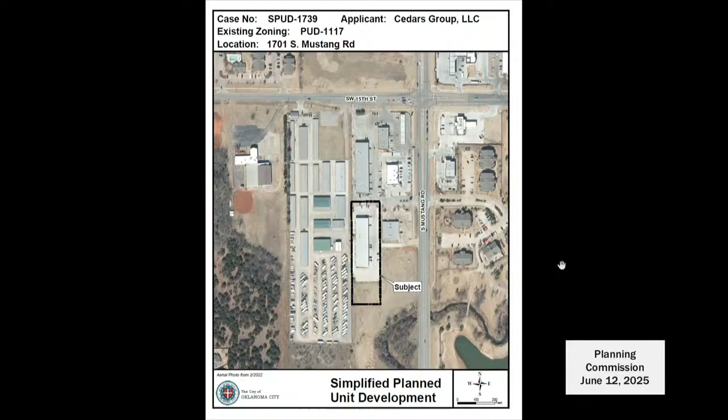I'd like to move to recommend approval of SPUD 1739. All right, we have a motion from Commissioner Meek to recommend the item to City Council for approval. It's been seconded by Commissioner Powers. Please cast your votes. Harrison, yes.

And that is unanimous. Good luck. Thank you, guys, good luck. All right, now we're going to do 26.

Item 26 is SPUD 1740, an application to rezone 2801 South Mustang Road from SPUD 1474 to SPUD 1740.

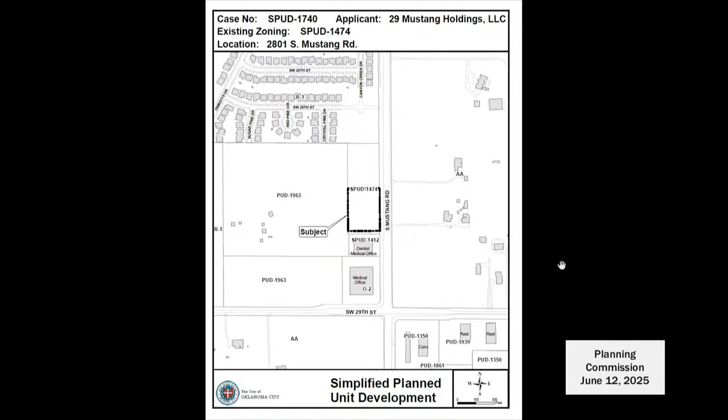Good afternoon, Mark Zitzow, 1 East Sheridan Avenue. Before you is an SPUD that has been approved multiple times. I handed out the wrong sheet, I apologize. You just hang on to it?

This SPUD has been approved multiple times. There's a purchaser of the property that seeks to do a car wash and kind of an oil change type business. So it's a literal carbon copy of the prior SPUDs that have been approved. We've had no protest at any point for the 3 rezonings that have occurred here, and so staff recommended approval.

There were no TEs after a conversation with Commissioner Meek. We have added a few TEs to further protect the neighborhood to the west. To his point and to his credit, there was not a neighborhood planned - it was agricultural land, and now, fast forward a couple of years, it's a duplex neighborhood that's coming. So we had no objection to the request, and they're outlined on that sheet.

It's the addition of 4 TEs. TE1 for permitted uses, we're changing the descriptor at the end of it. We're striking the 150-foot requirement, and we've replaced that with TE4 to say no speaker boxes or call boxes shall be permitted, with an exclusion that does not include a touchscreen system for an automated car wash. So rather than have a limitation saying it can't be within 150 feet, we've just struck the opportunity for a call box. But that doesn't prevent a coffee shop with a pickup window from still existing, which is why we kept the uses.

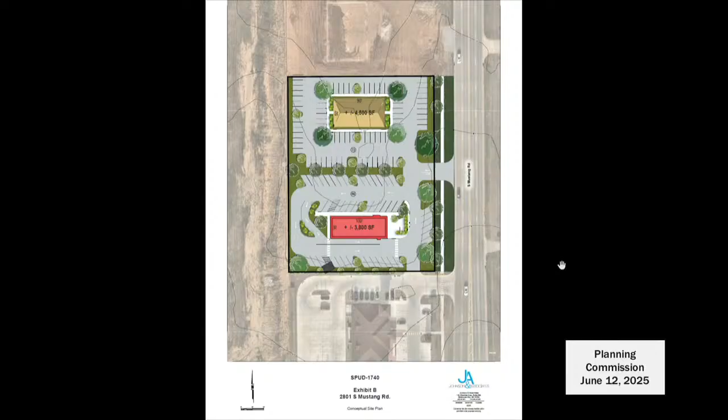So with that, happy to answer any questions. I provided staff a copy of this just now, so they have it for their record and the minutes. But yeah, with that, happy to answer anything you got.

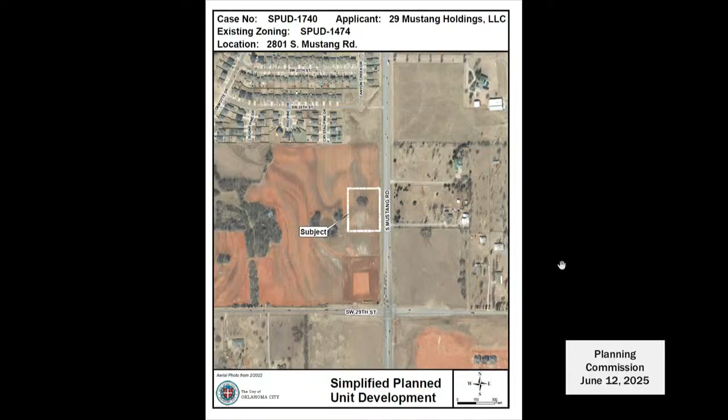Commissioner Meek, I don't have anyone signed up to speak. Okay, I want to say thanks to Mark for working this out. It was plus or minus 300 spuds ago, and things did change, and I appreciate the changes to the TEs.

Any commissioners have any other discussion? If not, I would like to recommend approval of SPUD 1740 with the new 4 TEs as provided by Mr. Zitzow. All right, we have a motion to recommend the item from Commissioner Meek, subject to technical evaluations.

That's been seconded by Commissioner Noble. Please cast your votes. Harrison, yes.

And that item is recommended for approval. Thank you. Thank you. All right, item 27.

Item 27 is SPUD 1735, an application to rezone 830 Northwest 66th Street from R1 to SPUD 1735. Mark Zitzow, Johnson & Associates, 1 East Sheridan Avenue.

Before you is an SPUD in a part of town that has had this kind of push and pull tug of war between industrial and residential. So you'll see a lot of I-2. Immediately south of the subject site, you'll see SPUD 1488, that's an apartment complex, and then 2 streets north, there's a few million-dollar homes that have been built. So this area is kind of wrestling with itself, but when you really look at it, this property, if you draw a line north and south, north of 64th, it's almost the division line between where we've seen industrial and where the residential has continued to thrive.

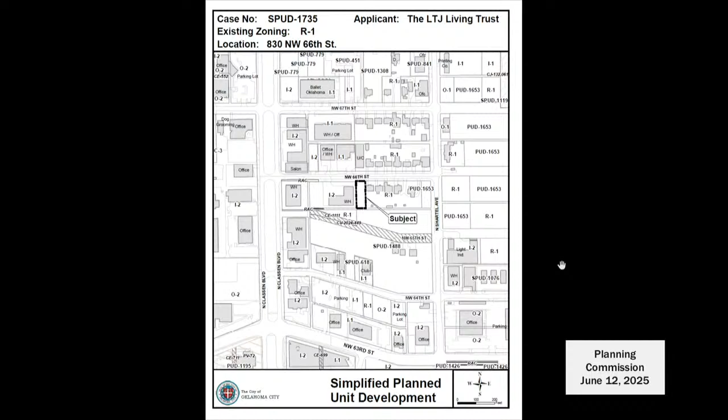So our client has sought an SPUD with a very restricted use category. It's to allow for an artist studio, gallery, and a living unit up above on the 2nd floor. So the SPUD is tailored to that. We've received no protests, there are no TEs, and staff recommends approval. With that, happy to answer any questions.

Commissioner Powers: Well, as Mr. Zitzow indicated, this is a very odd area that has kind of gone hard one way and then another during my time on the Planning Commission. But I think that this is a perfectly appropriate use, no matter how you look at it, and I'm in favor of it. If there's not anybody signed up to speak, I'll make a motion to approve.

So I'll make a motion to approve item number 27, SPUD 1735. I have a motion from Commissioner Powers to recommend approval.

With the TEs? There are no TEs. Oh, this is the one for the last one? Okay, and maybe one coming up. No, it's coming up. Oh, okay, sorry, okay. Okay, no TEs, we're good.

All right, so we have a motion from Commissioner Powers, seconded by Commissioner Meek. Please cast your votes. Harrison, yes.

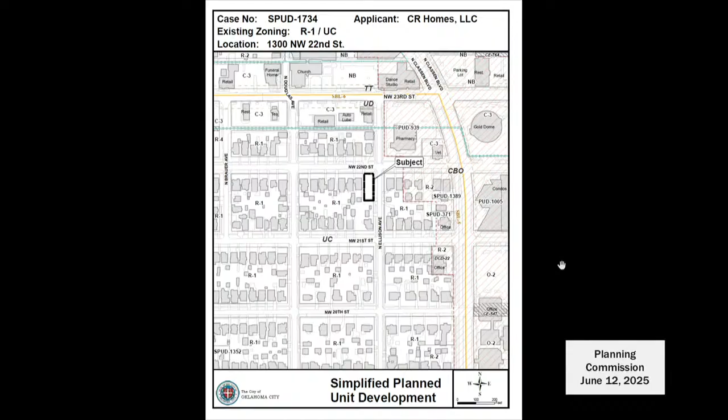Anyways, I know this is a long agenda and not everyone may have seen the images. That's part of the presentation. I wouldn't mind showing that. So everyone has an idea of what we're looking at.

I'm kind of sad Katie's not here to see this, because specifically, it's not in this render, but next door is a really cool little craftsman house built in the early 1900s. Opposite corner from this is one of Sam Gresham's developments with very craftsman-looking buildings. This blends into all of that, gives it a historic look, but also gives us a little more density, very close to the university and right behind Walgreens. So I'll get to see it all the time.

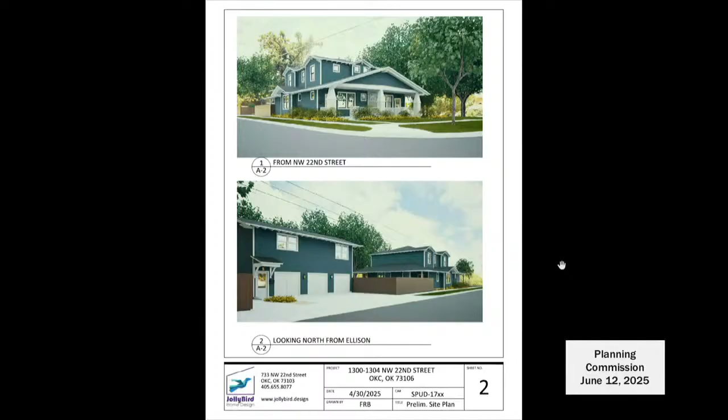Thank you. Well, I'll jump in here, I think.

I think this is a fitting proposal for the Gatewood community. Again, it's at that transition boundary, catty corner to the backside of Walgreens, but fits in well with the style architecturally of the neighborhood and even the typology of the house. Although it is a duplex in front, the garage apartment is the same type I've seen built originally in the neighborhood in the 1920s. So I think it's great, and you've hit the setbacks off the sidewalk for driveway parking.

So anyways, any other questions from others here? We'll come back to your TEs. Okay, I think we're going to do that. That's where I was. If anyone else wanted to jump in, I just wanted to offer that. And then just to understand the TEs.

I had some notes, but generally it was all okay. You've mentioned it is 3 dwelling units total. So I don't think I have any issue with this, modifying number 4. I don't really understand the urgency of that. If it's roof regulations, it's still covered under regulations generally in my mind.

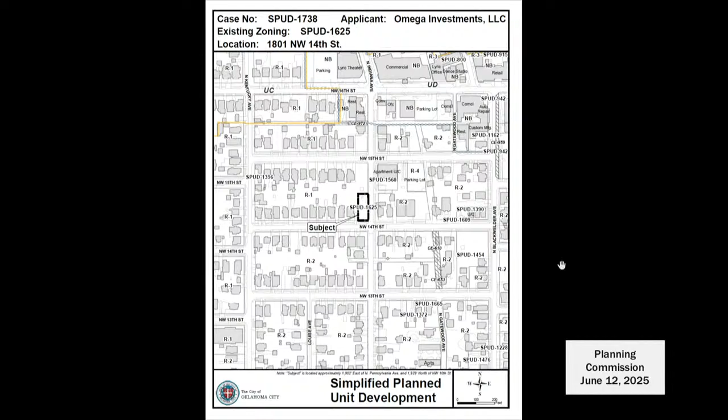Item 31 is SPUD 1738, an application to rezone 1801 Northwest 14th Street from SPUD 1625 to SPUD 1738. Mark Zitzow, 1 East Sheridan Avenue.

You now have the paper in front of you for the TEs we're going to work in on this one. You can go to the site plan. This is also an SPUD that has been rezoned maybe a 4th time, different owners, different projects. But this is very similar to the last spud in that it was done for mixed use, live over, commercial and residential. So this one is seeking to essentially add a unit.

Staff had 6 TEs, but we're going to add some that coincide. So the sheet that I gave you and also provided to staff: TE1, we want to remove the uses 8300.5, 8300.8, 8300.11, 8250.11, 8250.14. TE2 we agree to. TE3 we agree to, and per staff's direction we've modified it to limit it to 600 square feet per unit, which is per commercial space on the ground floor. TE4, 5, and 6 we agree to. That's a typo on that sheet, I apologize.

And then TE7, we're going to add a regulation saying that pervious paving shall be required for the parking area accessed by and fronting Northwest 14th Street. So with that, happy to walk back through those if there's any questions, but that's where we're at.

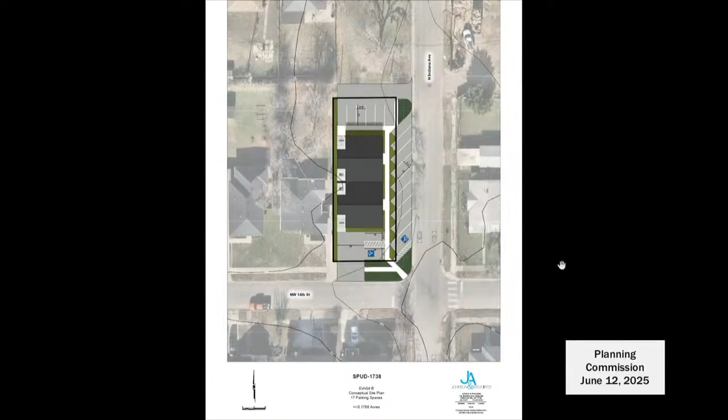Okay, anything else from commissioners? Sounds like we're ready for a motion. Okay, let's do this then.

Move to recommend approval of SPUD 1738, including the 7 TEs as submitted today by the applicant, with one amendment that TE6 is agreed as written in the MDS or the staff report.

We have a motion from Commissioner Govine to recommend the item for approval of City Council subject to the submitted technical evaluations. That's been seconded by Commissioner Meek. Please cast your votes. Harrison, yes. And that item is recommended for approval.

Thank you. We come to our last item for individual consideration, item 32. Item 32 is SPUD 1685, an application to rezone 3104 Northeast 82nd Street from PUD 771 C4 and AA to SPUD 1685.

Mark Zitzow, 1 East Sheridan Avenue. I'm going to turn it over to Jessica here to walk through it. I did just want to note a thank you to Commissioner Clare and Commissioner Harrison. This has been a challenging project, going on for quite some time. We got involved midway, but thank you to you both for attending the numerous neighborhood meetings, and kudos to Jessica Bloy for this room not being filled with protesters. So I think we got to a good point, but I'm going to let Jessica walk you through it all.

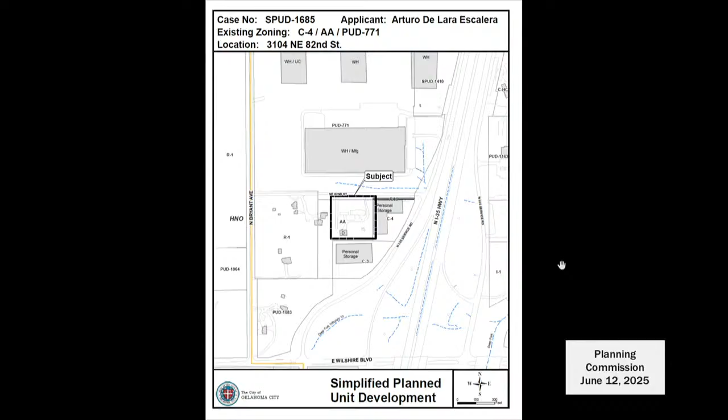I'll keep this quick since it's your last item. Staff has recommended approval, but there are 7 TEs. We can agree to TEs 2, 3, and 7. We cannot agree to TEs 1, 4, 5, and 6. We do not agree to TE 1 because we would like to be able to create that gravel parking lot and do vehicle parking and equipment storage. That was the whole purpose of the SPUD. That TE would require one of those future buildings to be constructed to be ancillary to that, so we do not agree.

For TEs 4, 5, and 6, we specifically negotiated with the neighbors on access controls. That was a very big issue for them, and the language that was added was paramount to them rescinding their protest letters. We ask that that language remains and that those access control barriers remain on the exhibit. We did add a sentence into the SPUD under the access section noting that this is a private street not under the purview of Oklahoma City. I am happy to answer any questions.

I'll lead because with Commissioner Pennington's departure, this case was ongoing and didn't have any representation from the commission as they went through some of these meetings. I did listen in and want to commend Jessica and Mark for the meetings and the tact and professionalism in working through this. It was very challenging, but in the end I think we've arrived at something that everyone is happy with, and it's a testament to them and the process that there were withdrawals of objection. So I think this defines the process: to work through with the neighbors and make this the best application it can possibly be.

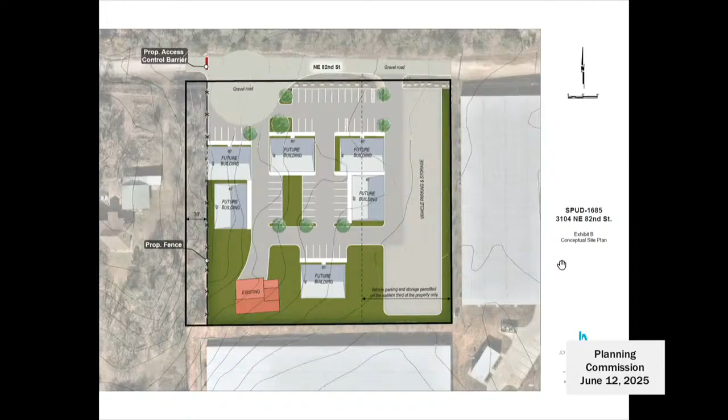Anything to add, Commissioner Harrison? No, not currently. Coming in as late as I was, it was a pretty smooth process for me. I just got to ride along. All the hard stuff was figured out by then, that's right? Okay, I don't have anyone signed up to speak. Are there any other questions or comments from commissioners? Looks like we're ready for a motion.

Seeing nothing else, I move that we approve SPUD 1685, subject to accepting or deleting TEs 1, 4, and 5, and accepting 2, 3, and 6... 7. Oh, and 6, yes. Yeah, and 6. Accepting 2, 3, and 7.

That's been seconded. We have a motion from Commissioner Harrison, seconded by Commissioner Noble. Please cast your votes. Harrison, yes. Privet, yes, mine logged out on me. Did you log out already? Yeah, thank you, accident. I said last item and you logged out, huh? Accidentally hit the X.